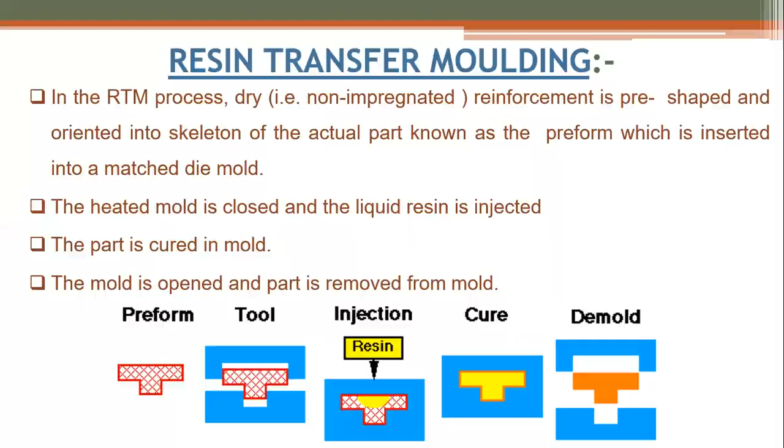Coming to the process, the RTM process is a closed mold, low pressure process, and a dry preform is placed in a matched metal die. Then a vacuum pulls the low viscosity resin through a flow medium that helps impregnate the preform. Impregnation means the resin flows into the shape of the preform and touches its surfaces.

Next, resin may also be forced by means of a pump, or sent through a pipe. So we can use it in both ways. That is the process. Next, you can see it in the picture.

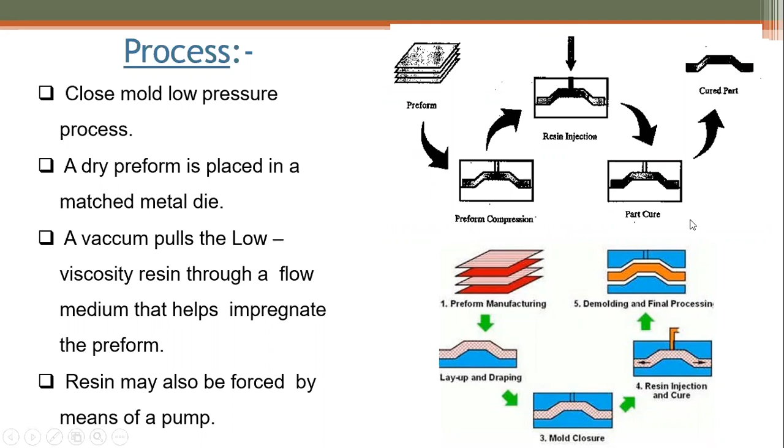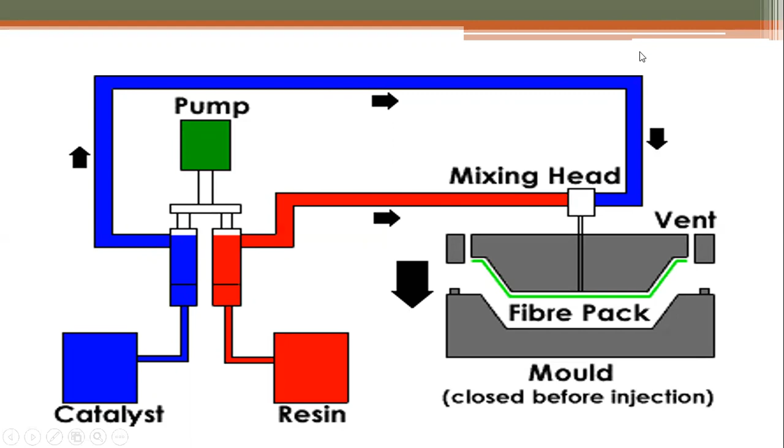So let's see the process. So transfer molding, which is known as resin transfer molding, is a closed mold process in which a pre-weighed amount of the polymer is preheated in a separate chamber that is called the transfer pot, and then it is forced into a preheated mold filled with reinforcing fibers, taking the shape of the mold cavity, impregnating the fibers and performing curing due to heat and pressure applied to the material.

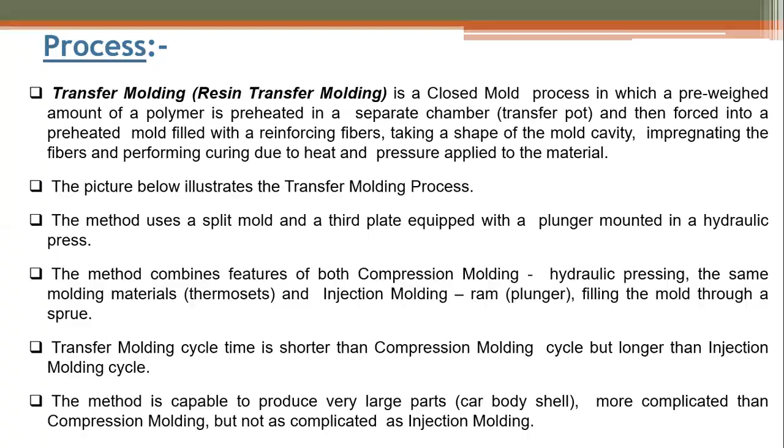So it generally has more complex shapes than compression molding, but not as complicated as injection molding. So this is the general process. You can see the picture here.

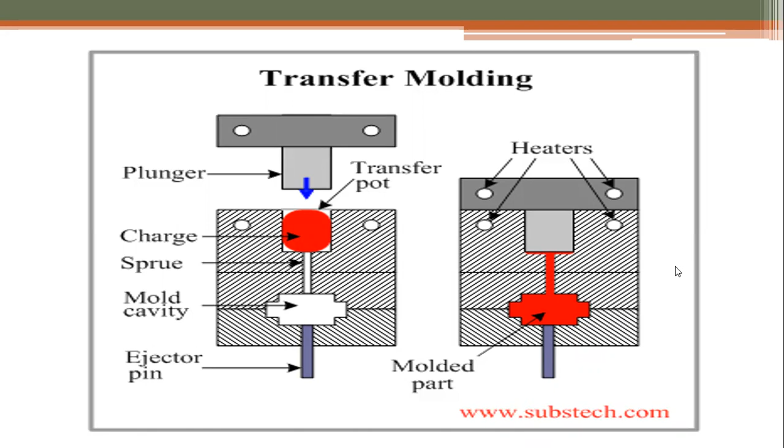The red color is the resin here, and it is applied in the mold cavity when it is closed. So this is the process which we can see in transfer molding. And the next one is the

advantages and disadvantages. Coming to the advantages of resin transfer molding, it requires very low skilled labor, so you do not need special skill for this process. It can use low skilled labor. So the first advantage is low skilled labor required. Next, low tooling cost, since no additional tools are used in this process. So that is low tooling cost.

Next one is low volatile emission, so no emission of gases or resins to the outside of the mold. And design tailorability, so depending upon the design of the mold cavity we can design our required shapes. Large complex shapes and curvatures can be easily made, that is very large shapes can also be easily made in this process.

Next one is a high level of automation. Automation plays an important role in resin transfer molding compared to the manual one. And next, the layup is simpler than in manual operations. It takes less time to produce in the mold cavity. So these are the different advantages of resin transfer molding.

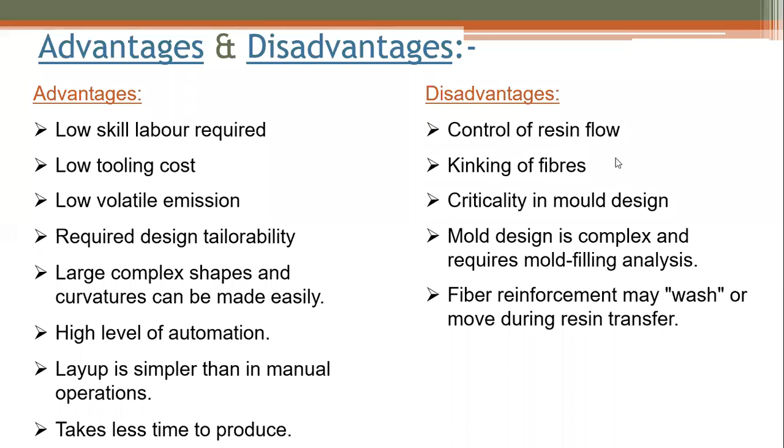So you can write these steps directly in the exam also. I have prepared them for that purpose. So you can prepare directly from the slides. No need of any other material. This is easily explained and described in the slides. So after the completion of resin transfer molding, we go to the autoclave process.

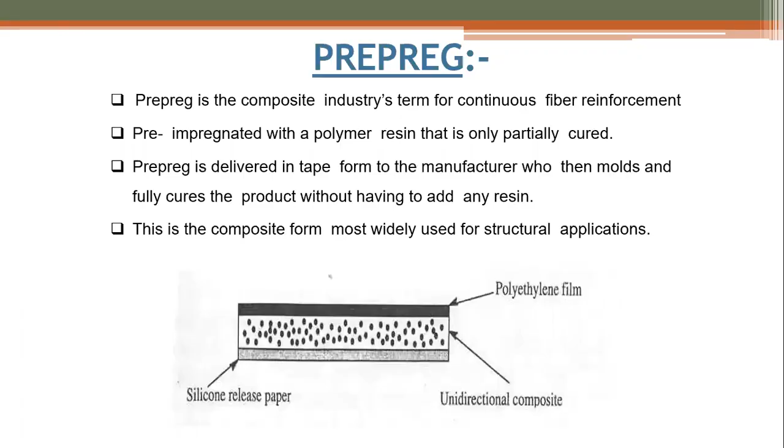So coming to the autoclave process, autoclave curing is a method in which a part is molded by one of the open molding methods. So the last one, RTM, was a closed molding method. This is an open molding method, and it is cured by subsequent application of vacuum, heat and inert gas pressure.

So this application is like the balloon. When we are filling the gas into the balloon, some gas pressure is applied to that balloon. That is the same process used in the autoclave also.

The molded part is first placed into a plastic bag, from which air is exhausted by a vacuum pump. This operation removes the air inclusions and volatile products from the molded parts. So any unwanted air or dust particles in the molded parts can be removed by this operation. Pressurized air is first sent to the molded part to remove the unwanted air inclusions and dirt particles.

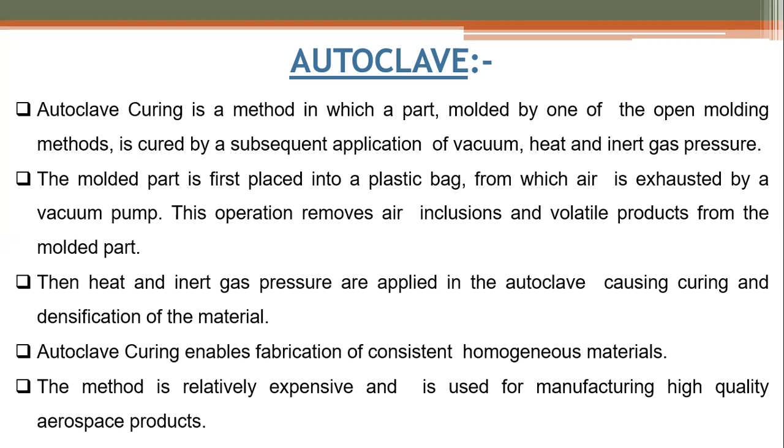So the autoclave is a closed vessel, either round or cylindrical. Generally it is cylindrical, and in some conditions round shape is used, in which processes occur under simultaneous application of high temperature and pressure.

So with high autoclave pressure, you can apply high temperatures, and when you seal the strip and close the chamber, the vacuum pump is used with the pressurized air. Then the breather and prepreg are formed into the mold cavity shape, and the tool is used to prepare the shape and take up the unwanted air inclusions. Then the high autoclave pressure is applied to the concerned shape. So that is the process in the autoclave, which is a closed vessel of round or cylindrical shape.

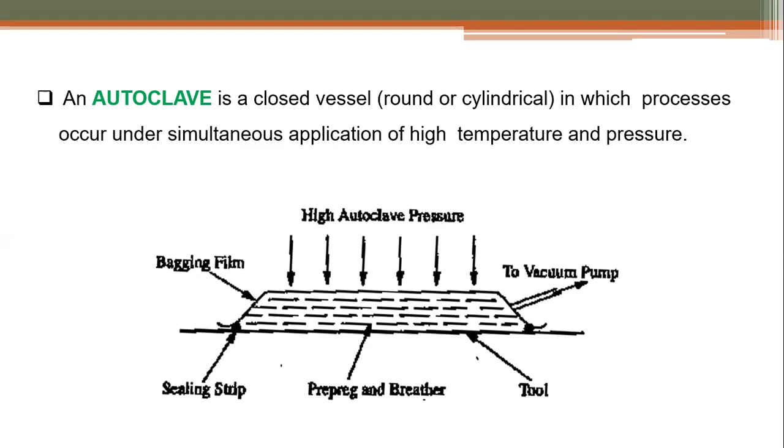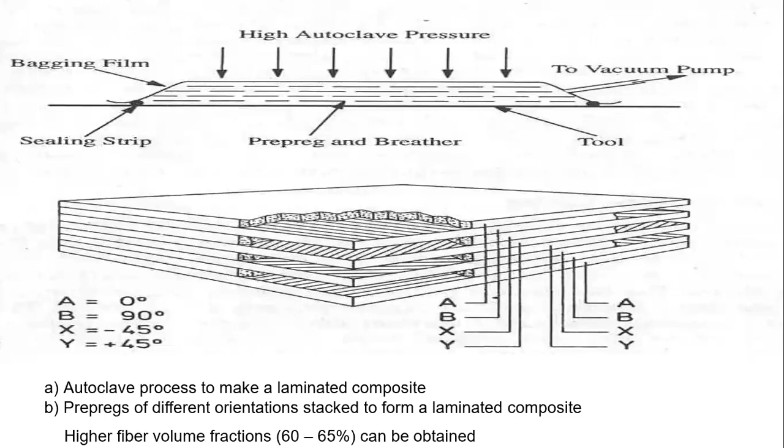And then coming to the characteristics of the autoclave process, firstly, it gives a very high quality product. Due to the compositions used and the output, the autoclave method gives a very high quality product, and it is different from those manufacturing methods like hand layup, spray layup and filament winding. So this is a different process.

Next, generally prepregs are used in this process to form the desired and complex shapes. Next, chopped fibers with resins can also be used. Chopped fibers means we are cutting the fibers into smaller fractions. That also can be used with resin. But here we are using long fibers only. So long fibers are used with the resin, and chopped fibers can also be used with the resin. So that is another way.

Hybrid composites can be produced from this autoclave method. Next, high fiber volume fractions can also be obtained. We discussed in the earlier slide that high fiber volume fractions can be obtained, up to 60 to 65%.